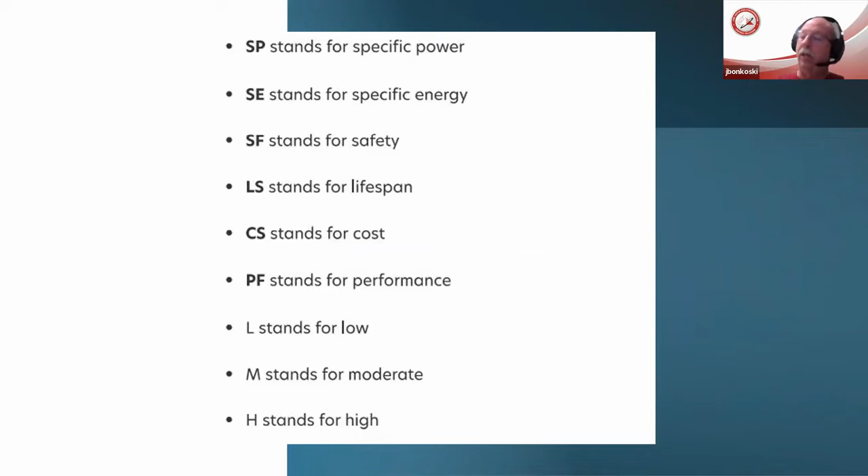When we look at lithium-ion batteries, there are basically 6 current lithium chemistries out there, and I'm sure more are being developed. These different batteries have abbreviations, and when you get this recording you'll be able to see them. They have specific power and specific energy ratings that tell you whether they're high, medium, or low as far as use and cost. People are working toward making these lithium-ion batteries more affordable and hold more power, so in cars we can go longer distances, or with our phones we can do more for longer periods of time.

And when we start looking at it, what are the concerns? Well, our demand is continuing to grow, and we're finding their uses replacing other battery technologies constantly. Currently there are 6 types, but following some articles and magazines, you'll see that groups are working on other chemistries for these batteries. Some of the hazards are the toxicity, the gases emitted when they burn, the HF gas, the flammable electrolytes, and being able to deal with those, as well as the energy stored within the batteries.

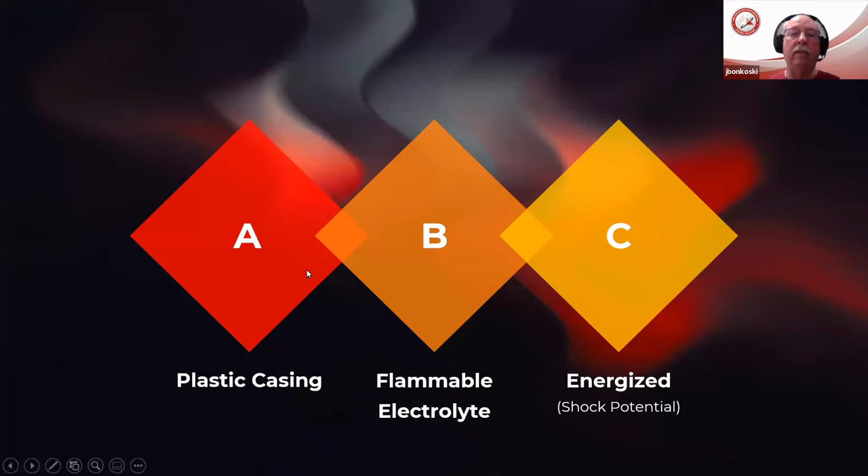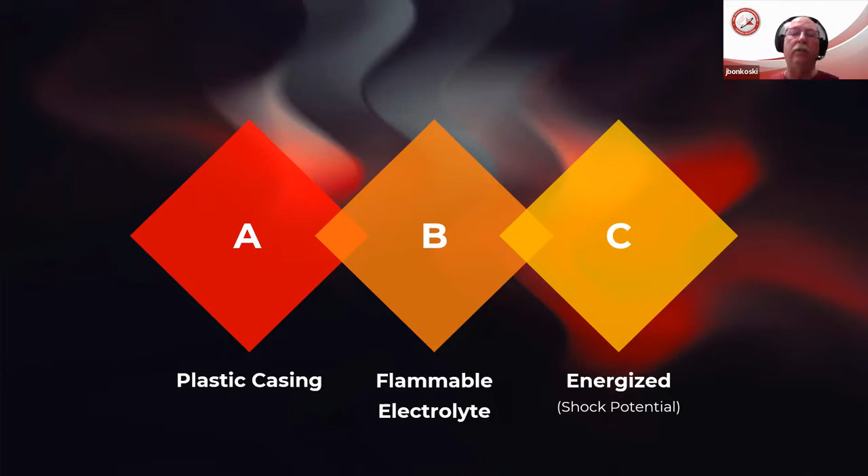We're going to talk about all the different classes of fires, because it's not just the batteries we're dealing with. We're also dealing with the containers that the batteries may be in. I'll discuss these different classes further into the presentation, but just something to be aware of—it's not just the hazards the batteries possess, but pretty much all the different components.

So when we look at what starts the fires, short circuiting can be one of the issues, where by a short circuit the battery becomes unstable and fails. Trauma—batteries being dropped, I'm sure all of us have dropped our cell phones or power tools at one point. Overcharging—if a charger fails, or the safety devices built into some batteries fail, this can allow a battery to be overcharged, causing an overheat condition.

And I'll point out again, when we use our cell phones—if you leave your phone sitting on the console or dashboard of your car while working on paperwork, I'm sure you've picked it up and seen that message about overheating, and it has to cool before you can use it again. So we get into these overheating conditions with lithium-ion batteries as well.

And I wanted to show a quick video involving one of Tesla's cars with an autopilot feature.

The car slammed into a tree and burst into flames. Police tell ABC News it appears no one was in the driver's seat. Here's ABC's Gio Benitez: Tonight, mystery surrounding a deadly crash near Houston involving a Tesla Model S. The charred wreckage captured on camera after it crashed into a tree and burst into flames. Two men inside were killed. The Tesla's high-energy battery reigniting over and over again. Firefighters trying to put the fire out for four hours with more than 30,000 gallons of water. The fire eventually put itself out. Now tonight, the question: was the Tesla running on autopilot? Firefighters found the men in the front passenger seat and the back seat. Police telling ABC News there's no indication anyone was in the driver's seat.

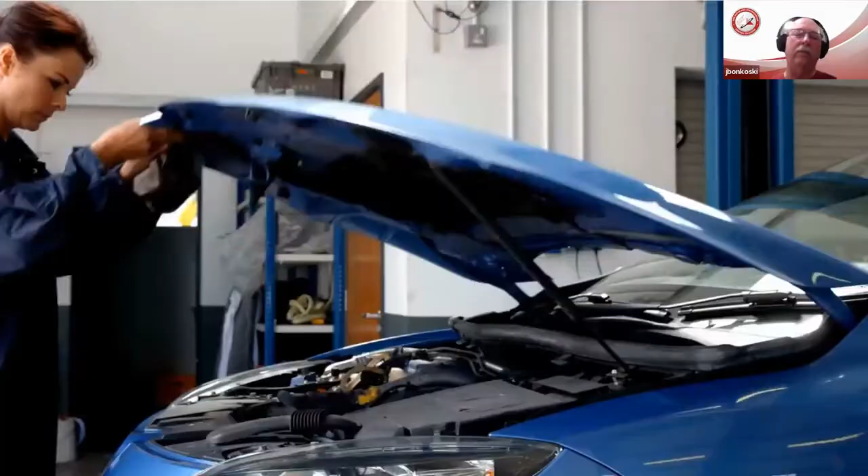So with this video, I want to point out that we're seeing these lithium-ion batteries adopted in many different locations and industries—not only in our homes with laptops and power tools, but let's start looking at them in our automobiles. What are the dangers? I mean, they're continuing to grow.

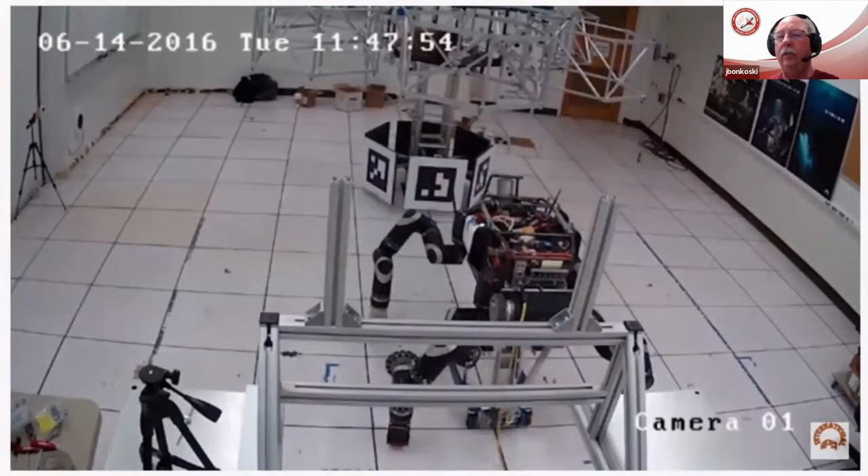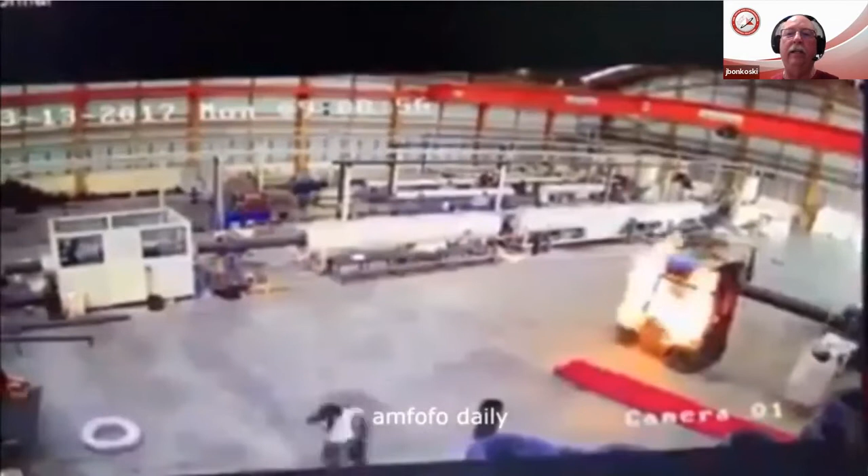I hear people say, let them burn. Is that truly the answer? We have to take into account, if we're going to let them burn, what kind of impact is it going to have—for instance, in a lab, or in a warehousing situation, when we look at the high-lows. I'm going to ask: when we introduce these batteries into our homes and our industries, are we prepared? I'm hoping I can give you some guidance and open up your eyes on how an encapsulator agent can help with those decisions.

So the popularity of lithium-ion batteries in electronics and transportation—especially transportation-wise—the use of lithium-ion batteries is growing exponentially every day. You're hearing about more auto manufacturers using them, and we hear a lot about cars, but we don't hear too much about the large trucks, the semis. How about school buses?

How about some of these other vehicles? You don't hear much about them. They're not really in the news. Manufacturers are starting to look at that, and not only that, but even some farm equipment now, airports.

As we go through, we're going to see where some of these can have an impact on everyday life: our electric and hybrid vehicles, our charging stations. Let's think about the parking garages, dealerships, and the repair facilities where that vehicle gets towed to if it's involved in an accident. Our electric tools and our parts suppliers, and again the towing companies that are going to be dealing with those.

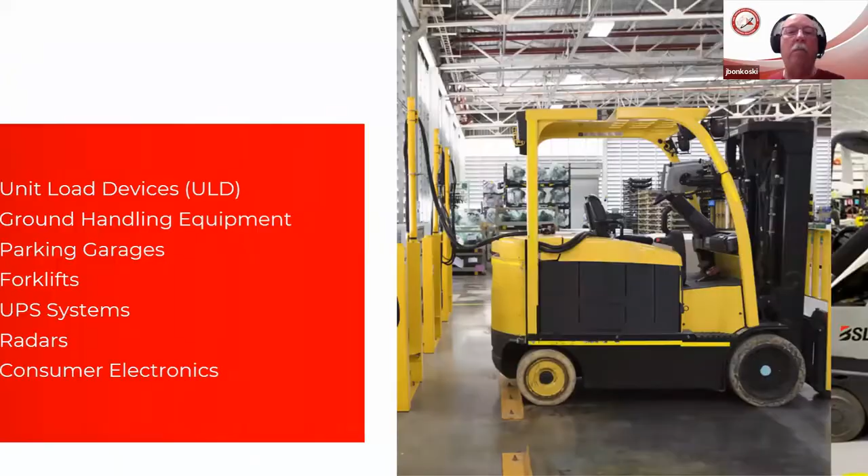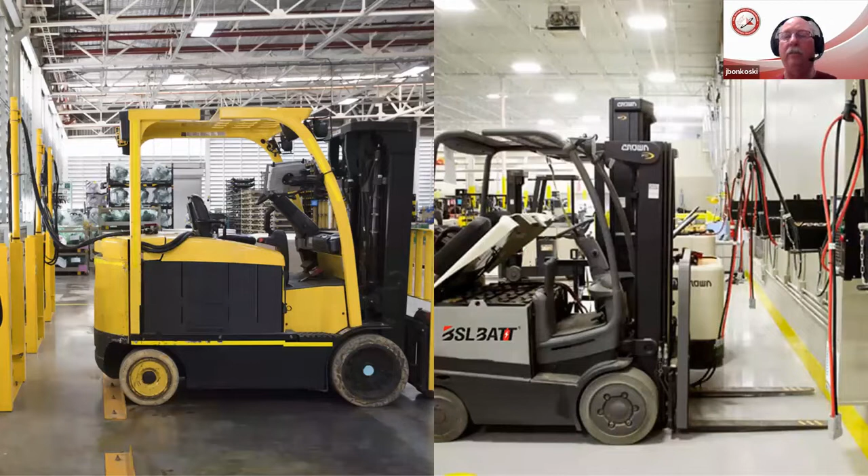The problem becomes when we start looking at these vehicles being charged, we look at how close in proximity each of these vehicles are. And again, when I show this picture, I don't see where any additional fire protection has been put in place.

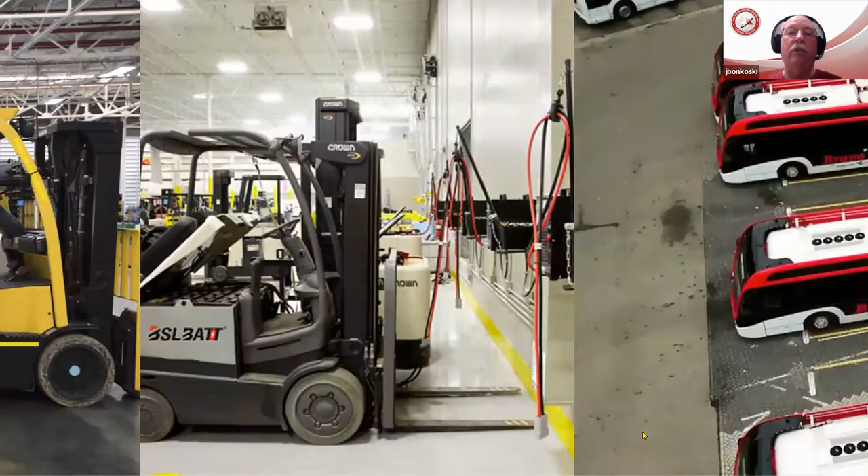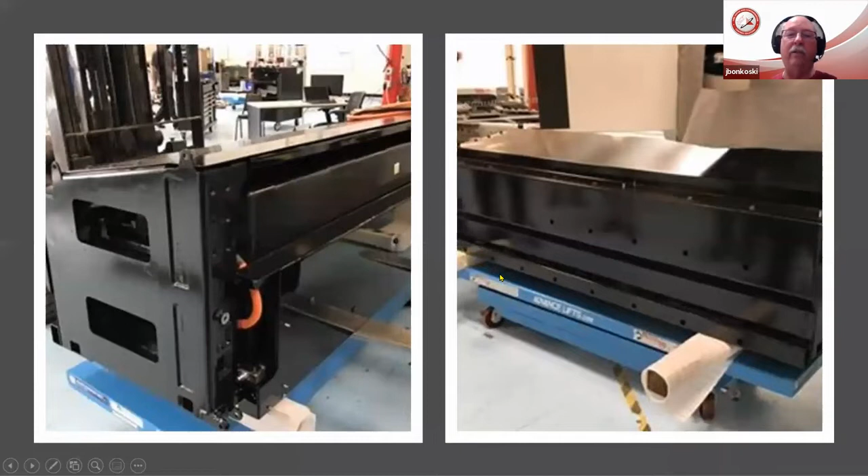So you have these buses and transportations. I mentioned earlier, our semis and tractor trailers are now starting to look at lithium-ion battery technology that they can use for making deliveries within a community where they don't have to have the diesel exhaust when they're stopped and parked. And this is, again, pictures of some of the batteries and the size of them.

As you can see, all they're going to do is get bigger and bigger as we try to make them so these vehicles can go longer distances or we can drive them for more time.

And I want to show this video because it's a good video. Here we are, all of these vehicles parked on charging stations in close proximity.

So while we have the vehicle burning, you could hear the force, the velocity of that fire. Rather impressive. And now you have that fire which is impinging on the vehicle next to it.

I also point out the charging cables, again, being slowly but surely melted away by the fire. I don't see on the charging station itself or in close proximity anywhere within this picture the disconnects.

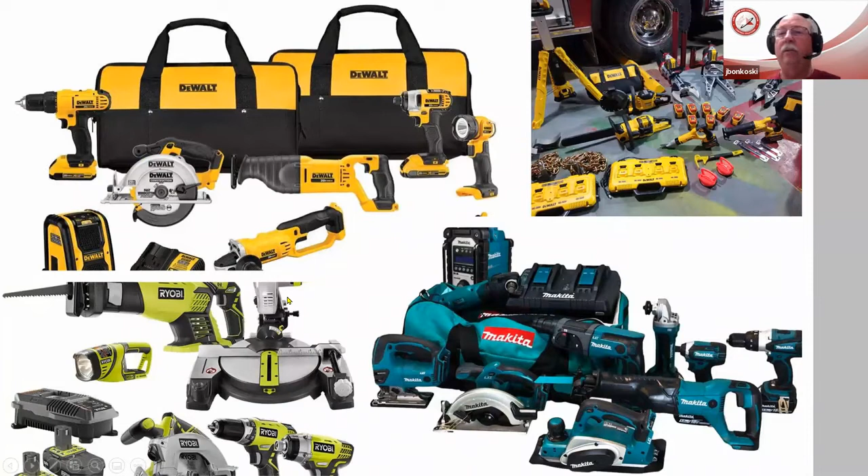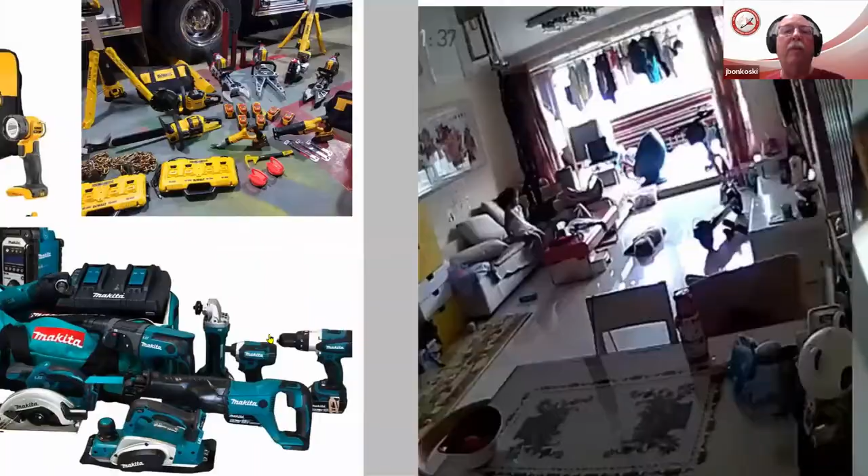One of the other things we like as a convenience is to be able to have another battery fully charged and ready to go when the first one in the tool is going dead and no longer has enough charge to continue being used. So we get into multi-chargers, where we have multiple batteries in our garage. And here we're going to see a quick video showing an e-scooter.

A great example of how, when you get into that fully charged battery - here he was charging up the scooter. You hear that pop where something fails, and all of a sudden that e-scooter gives off a lot of that HF gas and toxic gases, and then we have that rather violent explosion. A laptop - I'm sure we've had, seen, or heard of laptops.

So here you have a laptop charging. I don't know if it had been dropped previously or what type of abuse it might have suffered. Just sitting, charging, and it fails. Something went wrong. An e-scooter.

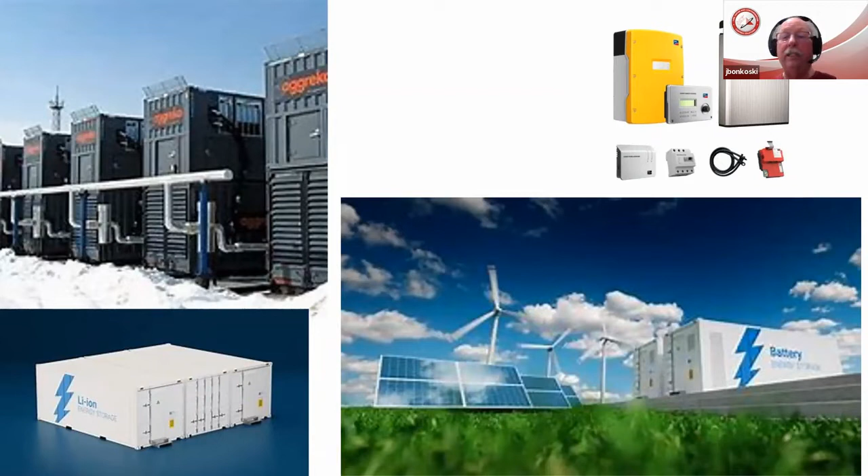So now we're looking at industry. Not only residential storage systems, people trying to get off the grid and be less reliant on the power industry, using solar and saving that energy to batteries, but also industrial storage systems, and mass storage systems where we basically peak shave. We charge the batteries up during non-peak hours, and use that power during peak hours to help power the grid, so we're not reliant on others to help provide energy.

Some of the isolated incidents we can talk about: here we have some in Europe and other countries where a plane, because of a battery burning, is evacuated. We have a boat because of a burning battery, 5 are injured. And again another airplane that's evacuated. In 2019, Arizona, a battery energy storage system exploded and caused injuries, some career ending for firefighters.

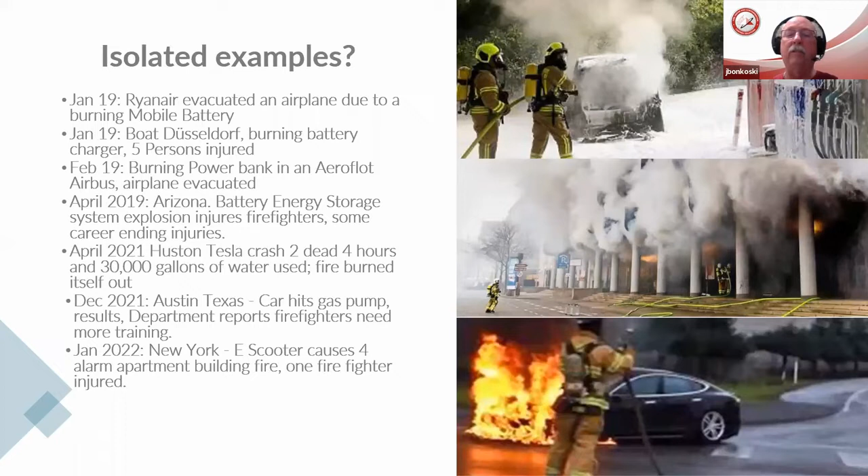Here most recently, in April 2021, a Tesla that killed two burned for 4 hours, using 30,000 gallons of water. Then in December in Austin, Texas, we have a car that hit some gas pumps - you'll see a video shortly - and firefighters saying, hey, we need more training. And most recently, just here in January, we have an e-scooter that caused a 4-alarm apartment building fire and injured a firefighter. So these cases and incidents are starting to increase in number.

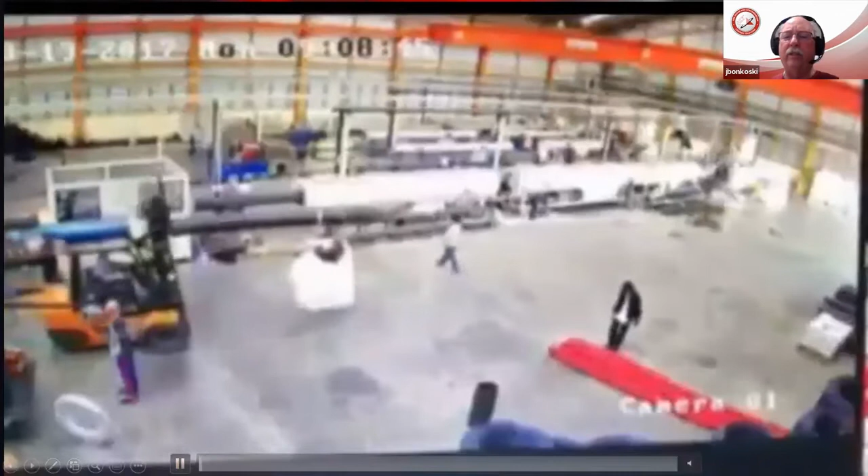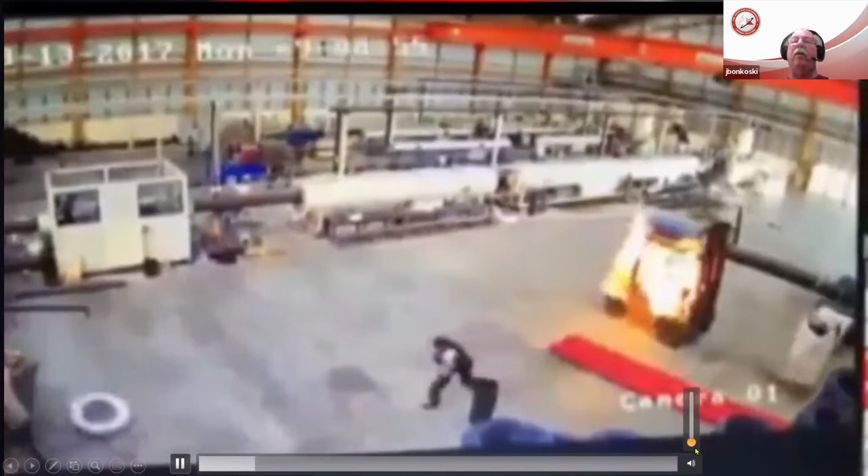This is a good video. It shows a high-low. One of the things I want to point out as we watch this video: what is the extinguishing agent that's required in our buildings? You get into our warehouses, our factories, our high rises, and the required extinguisher is a dry chem, an ABC type extinguisher.

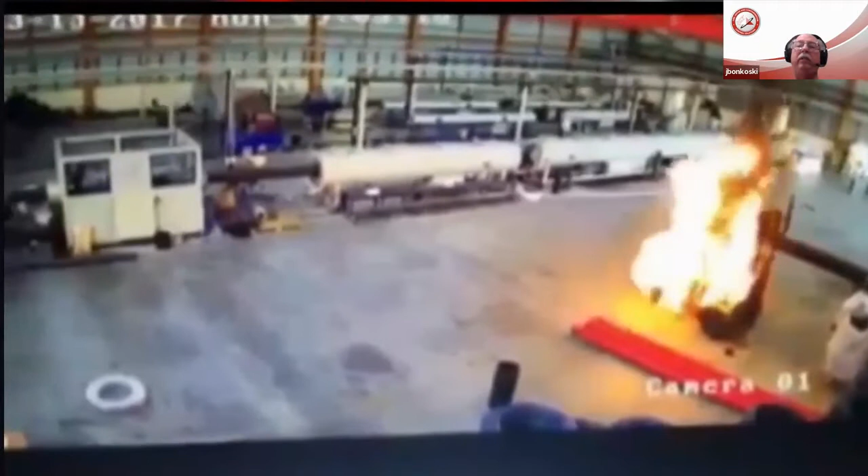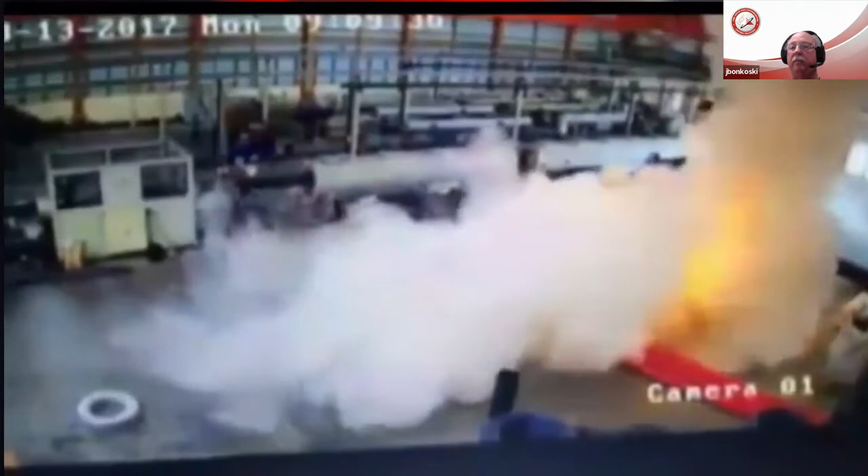And so these employees are running around throughout the facility. They're grabbing these dry powder, ABC extinguishers that are required by code. They're coming along, working to try to put out this fire. It appears as they start to use the dry powders that they're having some success - getting a little bit of a handle on trying to extinguish this fire.

However, you'll see their efforts are in vain. And we're going to go through and see in videos exactly why. But you see that burst, that flare up, that fire flare up - again, just like that truck we saw, that started rolling away.

Here we have the high-low. It also kind of rolls away, rolls further and deeper into the warehouse, burning the warehouse down, causing multi-million-dollar loss because they did not have the right type of extinguisher.

Those buses that I showed earlier on the charging stations - well, how about when they're at the terminal picking up passengers? Let's look at all the dry chem extinguishers on the ground. Again, that's what we require by code, when we look at our building codes and our different codes. So again, I throw the question out: are we, let's put it this way, not only you, but are we prepared when we start talking about these hazards?

So let's start with that dry chemical. Why doesn't it work? Well, it doesn't remove the heat. It's very inefficient at being able to cool. It can't stop or prevent a reignition unless you can build up a pile deep enough to bury it. It does nothing to reduce the toxicity of the gases being released. So it's very ineffective at extinguishing these types of fires.

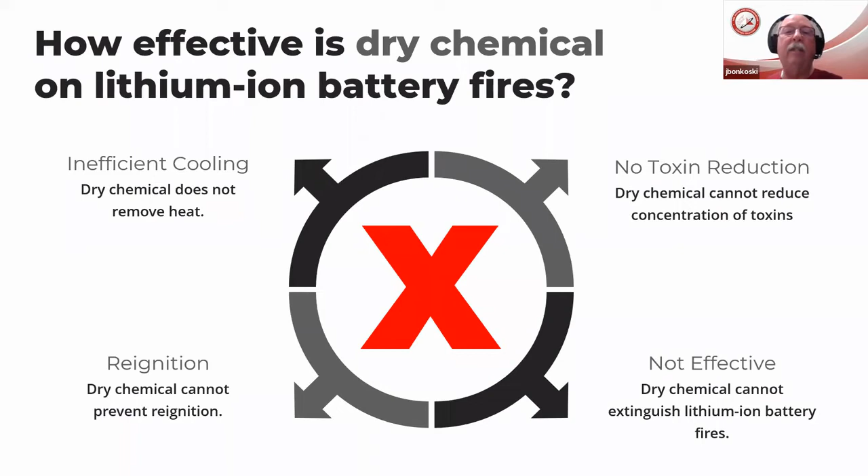And I'm going to show a quick video with the powder. This is showing the 18650 lithium-ion cells, the round ones. It's charged up to 48 volts, 95% charged. We're sitting there using that dry powder, and as you can see, it is very ineffective at being able to extinguish the lithium-ion batteries.

Okay, when we start looking now at foam - what is usually used after firefighters use water and water does not seem to be effective, our next go-to is usually foam. This testing that was done, I'm going to mention more of it as we go through - these videos are coming from testing done on behalf of HCT Europe and Johnson Controls, trying to find third-party independent testing on a solution for lithium-ion battery fires. So these are videos from that testing.

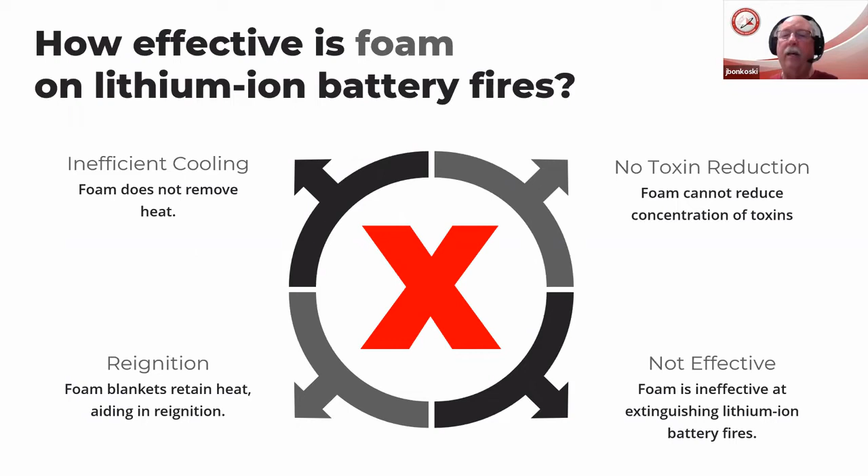So let's look at a video that was done testing foam. Same number of batteries, same charge, 95%. We start using foam, and as you can see, there's no effect. He's constantly spraying that stream of foam trying to extinguish the batteries.

The next thing, and this is one of the things we see recommended for a lot of those energy storage containers, is an inerting gas. They use a few different types of agents. While these inerting gases may be useful in some instances, like switch centers or some applications within our industries, they do very little to cool and cannot stop thermal runaway.

So there's a possibility for reignition once that inerting gas is released from the room, building, or structure where it's been activated. You've still got the heat, the gases, the toxins, everything. This is the case with the Arizona firefighters. While the inerting gas might have extinguished the visible flames, it did nothing to cool or stop the thermal runaway. So when they opened up the container and oxygen or air started to get in, it hit that air-fuel mixture. It was just right, the heat was there, and we had an explosion, injuring some firefighters — career ending injuries.

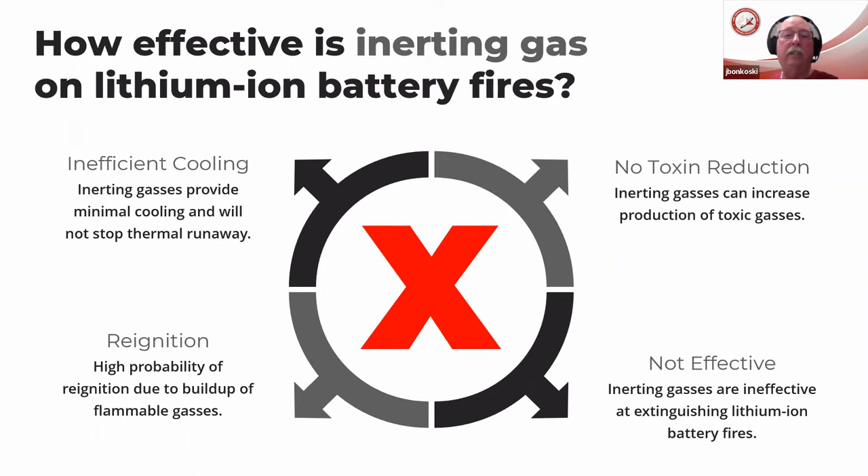So again, not an effective extinguishing agent, especially for some different types of uses.

Here's a video from NASA, in one of their labs. They're working on a robot. Luckily the engineers working on it happened to go to lunch and weren't there when this battery failed. But we have a person who comes in because NASA understood dry chem wasn't the solution, so they use an inerting gas. As you can see, the inerting gas is very ineffective — it has little to no effect at all on extinguishing this lithium-ion battery.

He comes in with a second one. I want to point out that he's exposing himself to that toxic gas, which I'll mention more as we continue the presentation. While he does achieve somewhat of an extinguishment, if the video continues it does reignite — we get a reignition of the battery. The fire department comes along and actually removes the battery from the lab.

The next thing we're very familiar with is water. Everything published here in the United States says the answer for lithium-ion batteries is copious amounts of water. When I was doing my training in the fire service, learning about hazardous materials and everything else, I heard 'copious amounts of water' many times, and it was always a head scratcher — how much is a copious amount of water? The video I showed earlier in the presentation showed 30,000 gallons of water for one car fire. 30,000 gallons — is that a copious amount?

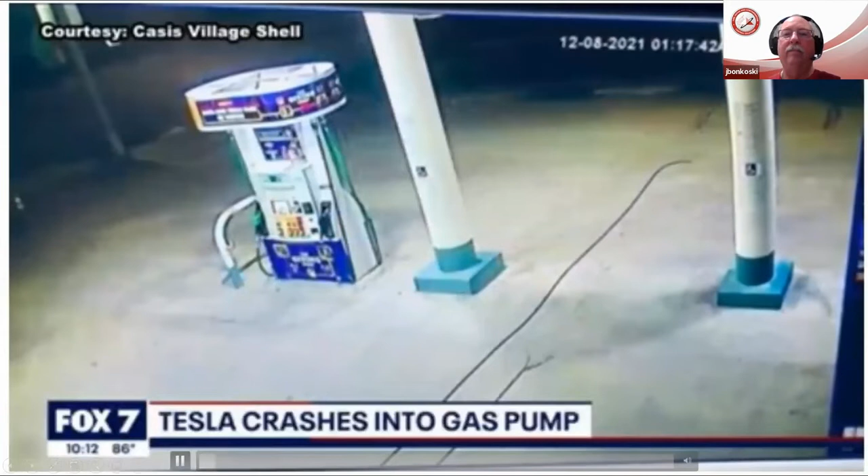So when we look again, here's that Tesla on the left, but we have another one. Image of the Tarrytown Shell station at 1:21 Thursday morning. An instant later, this is the moment when a Tesla sedan slammed into the pump. Flames from exploding lithium batteries created an orange glow. The driver, who was not immediately identified, survived but was charged with DWI.

When the gas pumps fell, flames coming from the passenger side of the Tesla can be seen. About a minute later, sparks erupt as more batteries ignite in what's called a thermal runaway. It was a situation Austin firefighters were prepared for, according to Division Chief Eddie Martinez. We've known about these for quite a while. It's just, in the city of Austin as far as I know, this is our first one specifically with the Tesla.

This picture shows fire crews in tactical positions for what was a long fight. The fire burned all the way to the car's frame. But lithium batteries can play possum and reignite. A warning, Martinez says, was given to the tow truck driver. And it did - 5 hours later, the car caught on fire again. But he took our warning and put it away from vegetation. He put it away from other vehicles so it didn't catch anything else on fire.

The fire that happened here is expected to be discussed during a training session Austin firefighters will have next week. That class will be taught by the fire chief from the Woodlands, who's become somewhat of an expert on Tesla fires. These car fires can be managed - we're going to see a lot more of them in the future.

Chief Palmer Buck told me this fatal crash in April is an example of how difficult the job can be. It took more than 28,000 gallons of water to keep the charred battery pack cool. That allowed investigators to work without having another thermal runaway. Just doing all the research, it still comes back to the basics of water, but a lot of water. There's not any, at this point, any easily obtainable extinguishing agent on the market to deal with these fires.

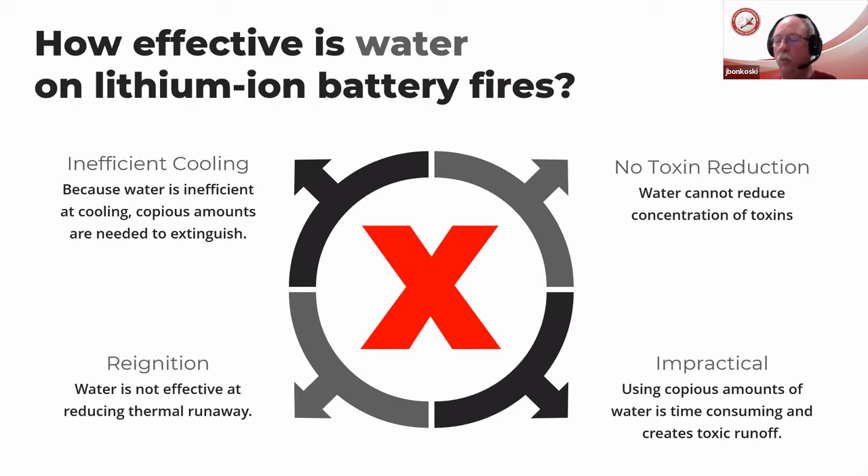Because as you can see, here we have people going and calling themselves experts. And again, I'm not trying to bash anybody, but when you look at the trainings that we have here in the US, the solution and the answer is for the fire service: copious amounts of water. We haven't looked at anything other than that, and that's why Europe is light years ahead of us, and why HCT is wanting to do these webinars and offer trainings to firefighters so that we can work. And I show this video, a nice little waterfall trickling down, water trickling on down a little stream, because when we talk about 30,000 gallons of water on one car...

You look at the second Tesla there in Austin where it hit the fuel pumps, and now you're dealing with two types of hazard - you're dealing with a hazard of fuel as well as the batteries. And while many of these departments are saying they have fire hydrants, they have all the water they need, they don't have an issue with that - many areas of the country, in the United States and even around the world, are going through drought conditions. So now I'm going to ask again: do you truly have an extra 30,000 gallons of water for one car?

And as these batteries get bigger, are we going to be able to deal with them and control them? What's a copious amount of water?

So as we've seen what other agents and what other types of extinguishing mediums have been able to do with this type of hazard and emergency, let's start learning a little bit about F500 and encapsulator technology.

One of the big things when we start looking at firefighting agents or solutions, we're trying to get away from PFOS, PFOAs. We're trying to get away from fluorinated ingredients that are the forever chemicals. F500 has been tested and is 100% fluorine free. It's non-corrosive and 100% biodegradable. We're not going to stay in the environment. We're not going to be a forever chemical.

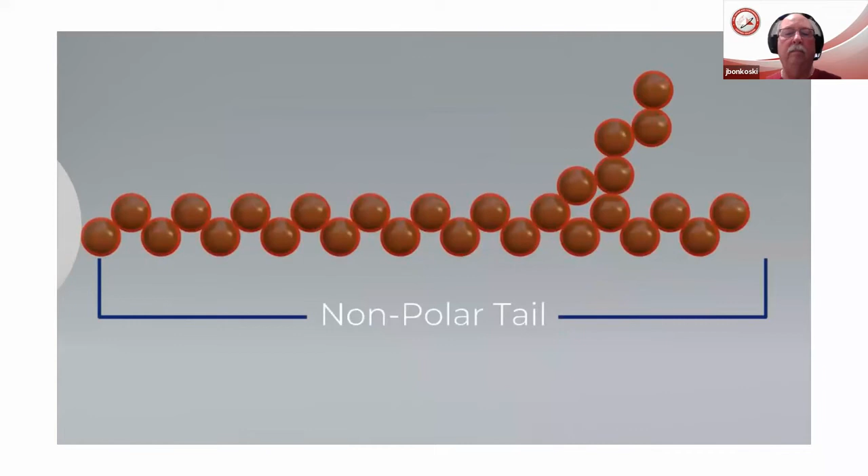Encapsulator technology, the next generation of fire and hazard mitigation. First, we start with a simplified version of a single encapsulator agent molecule consisting of a hydrophilic polar head which loves water, dissolves in water, and a hydrophobic non-polar tail which fears water and will do anything to get away from water. Once the EA molecules enter the water, they instantaneously and automatically orient with the non-polar tails inward and the polar heads outward, forming millions of spherical micelles.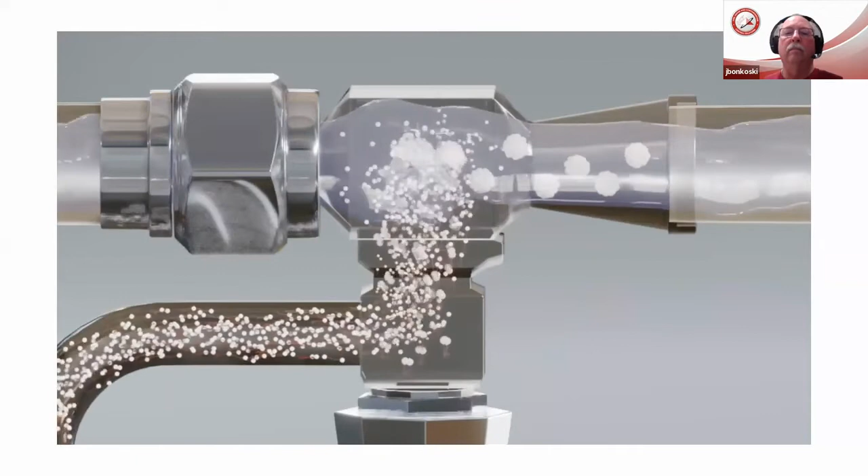Micelles travel towards and exit the nozzles, forming EA droplets. Micelles nearest to the surface of each droplet automatically break apart. The non-polar tails orient outside the droplet with polar heads on the surface, forming an EA skin on the surface of every droplet. In addition to the EA skin, there are millions of molecular spherical micelles within each droplet.

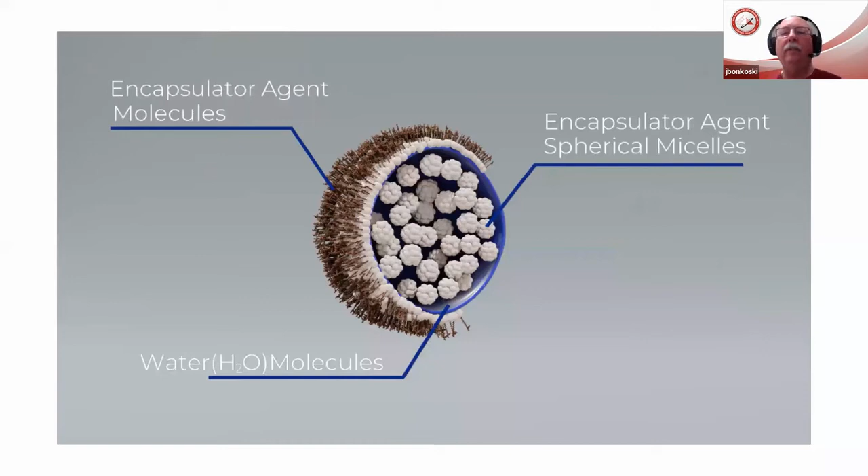Okay, so that gives you a little bit of an understanding of what a spherical micelle is. And again, I'm going to review what we just saw. That molecule has a polar head, loves water, okay? A non-polar tail hates water, does everything it wants to get away from the water, which is one of the ways that when you add an F500 encapsulator agent into water, it mixes instantly because of those tails trying to get away from the water. So it spreads out and mixes with the water rapidly.

So once it mixes and creates those spherical micelles within the water, as that water comes out of a nozzle, a sprinkler head, or whatever source it's being utilized from, those molecules on the outer surface of the water droplet spin away from that spherical micelle. So the ones on the surface break apart and form a skin on the surface of the water droplet.

So when we start looking at some of the different classes of fires that we're going to be talking about, that becomes important as to why it's able to rapidly cool, why it's able to rapidly extinguish, and how it's able to do all the things that we're going to continue to talk about as we go through the presentation.

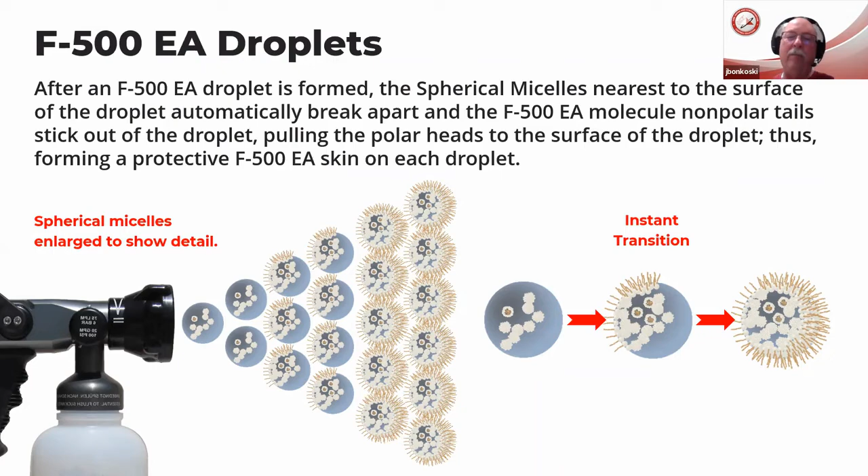But one of the things I want to also point out in this picture, if you look at the very last water droplet to the right, you'll still see that there are millions of those spherical micelles in the water droplet. So we're not only putting a skin on the surface, but we still have millions and millions of those spherical micelles inside of each and every water droplet, which is important to help understand how encapsulator agents work.

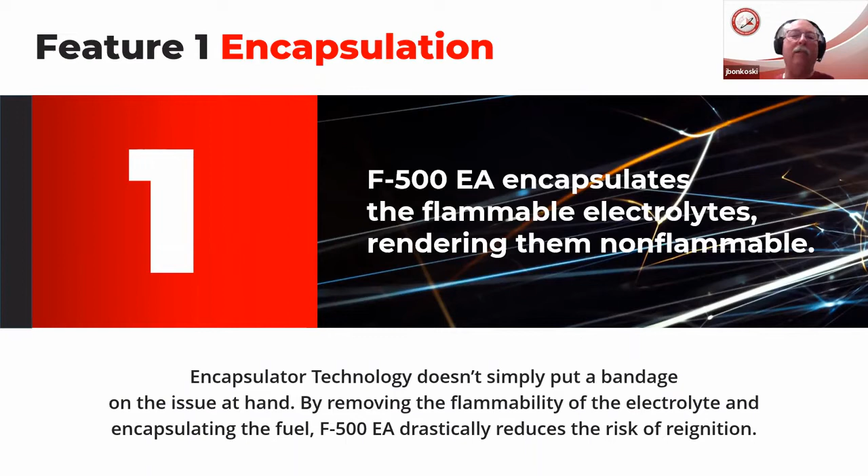So I'm going to talk about encapsulator agents and how they're able to work on flammable electrolytes and why they're able to work on those flammable vapors, because of how and why they work.

We're going to talk about that rapid reduction in heat. And if we think back, if you're a firefighter, on your very first day of school you learned about the fire triangle. If you remove one of the legs of the triangle—of course I'm dating myself when I say triangle because now it's a tetrahedron—but if we remove one of the legs, we extinguish the fire. Well, we're going to see how we're able to encapsulate the fuels, how we're able to rapidly reduce the heat, and how we're having an effect on all the different parts of that fire tetrahedron.

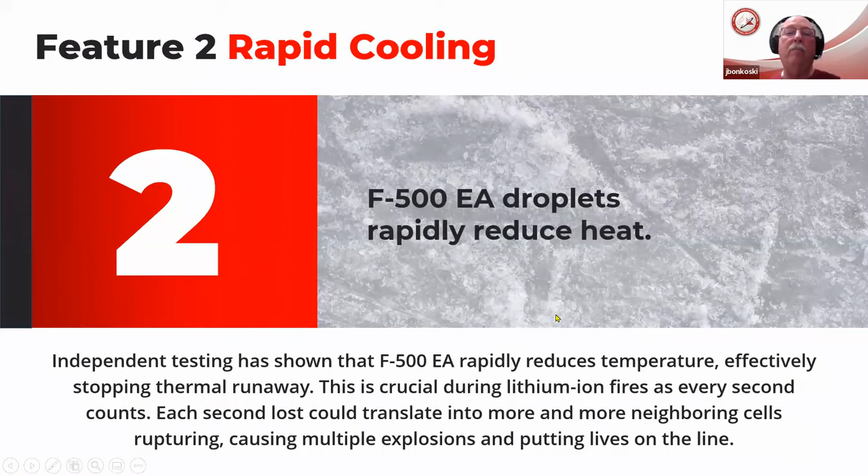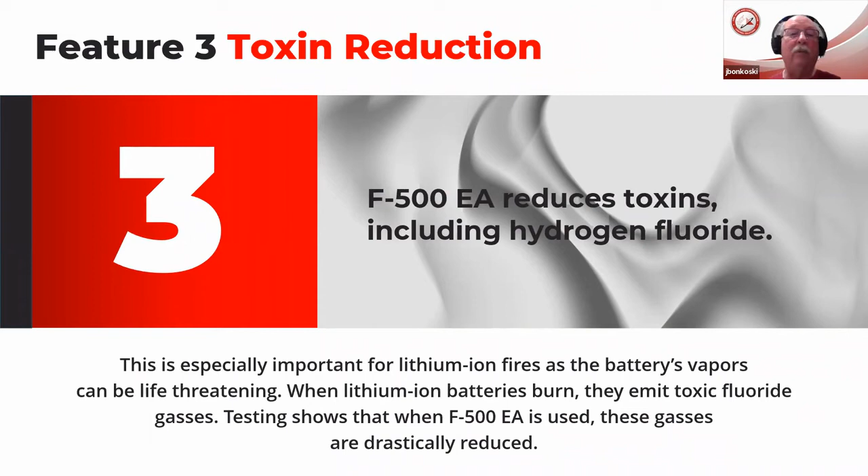Some other things we're going to talk about are the reduction in toxins - the HF gas being released and how it can be life-threatening. Think back to the gentleman in the lab with the CO2 extinguisher, the inerting gas, or the gentleman in the house with the e-scooter where you saw the amount of smoke released from those batteries. We're going to talk about how F500 does rapid cooling and stops thermal runaway, how by encapsulating those flammable electrolytes we reduce and eliminate chances for reignition, and how we encapsulate and reduce the amount of toxic gases being released.

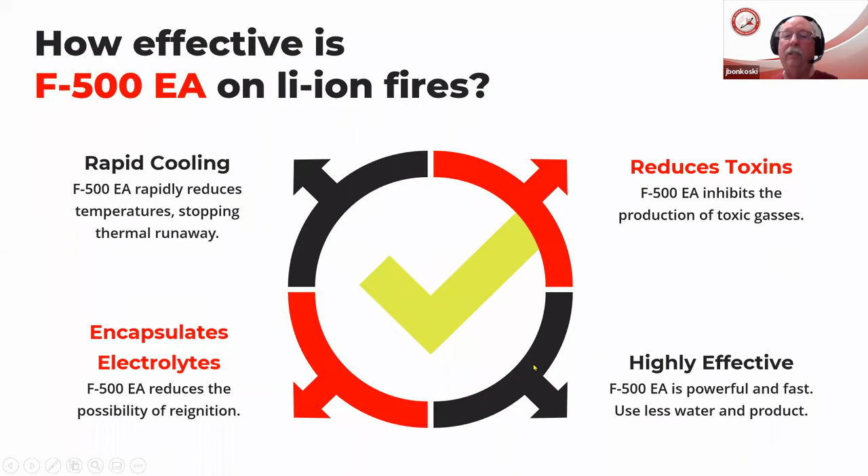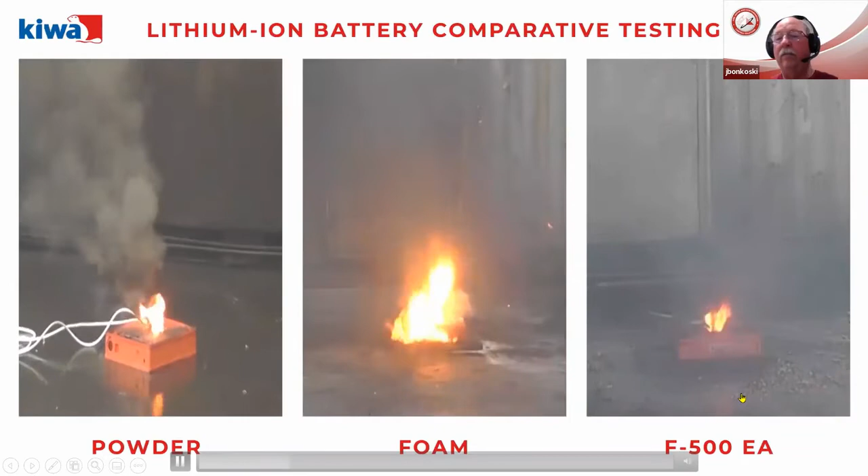So I want to show this video, which is comparative testing. I know I showed videos side by side earlier. Here you have the powder on the left, foam in the middle, and to the far right F500. In the first video with the foam, they were using a constant spray application. With the F500, you'll see he's using short little squirts, not a constant application - just short squirts, getting into a bit more application, and he's pretty much extinguished this battery.

Now on the left, with the powder, as he came into view he did not have an air pack on. This initial testing done with lithium-ion batteries led to that gentleman who was doing the extinguishing spending time in the hospital detoxing because of the HF gas he was exposed to during the testing.

Because of that, testing then went indoors and was more thorough in looking at other things. This is one of the things that came out of the published report for Johnson Controls, and it basically states that powders are poor, not recommended, do not apply on lithium-ion batteries. Yet what's the extinguisher we have in all of our buildings? What's the one that's required?

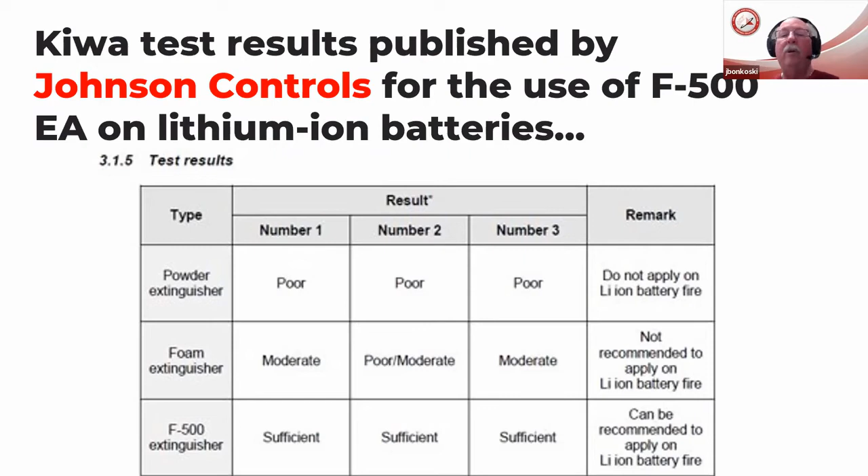In Europe, they found a solution. In fact, they're marketing through one of their distributors fire extinguishers with literature and pamphlets recommending F500 encapsulator agent as the agent of choice for lithium-ion batteries because it could stop thermal runaway. Some more conclusions state that a handheld extinguisher with F500 additive is better to achieve suppression with these lithium-ion batteries. So that's why they're marketing them.

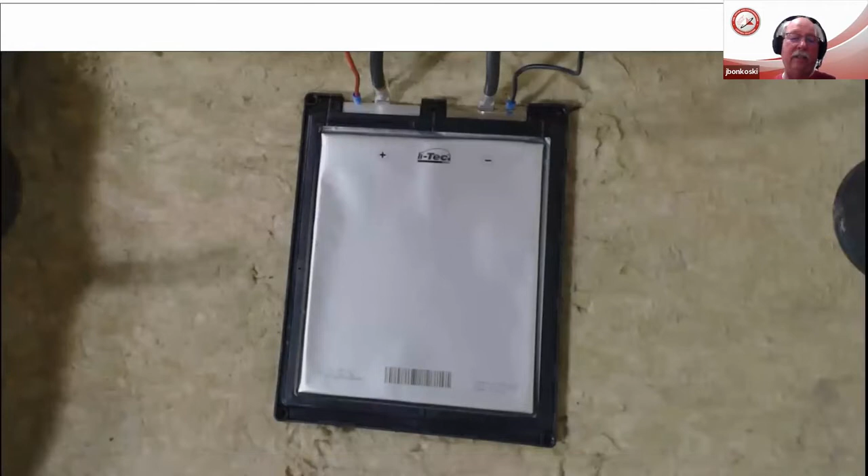We've seen the videos with the 18650s, and when we hear about these fires in the news with Teslas, Teslas use 18650s. But I want to point out that's not the only type of battery being used in vehicles. Here's an example of a polymer pouch style battery that might be in a laptop.

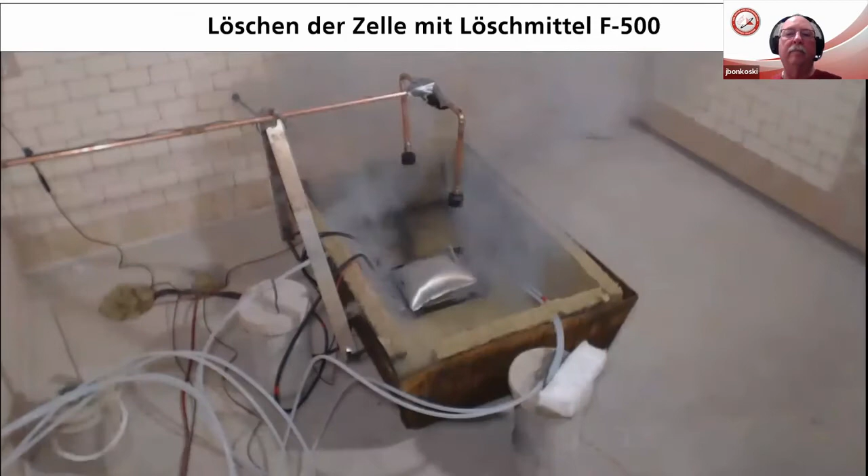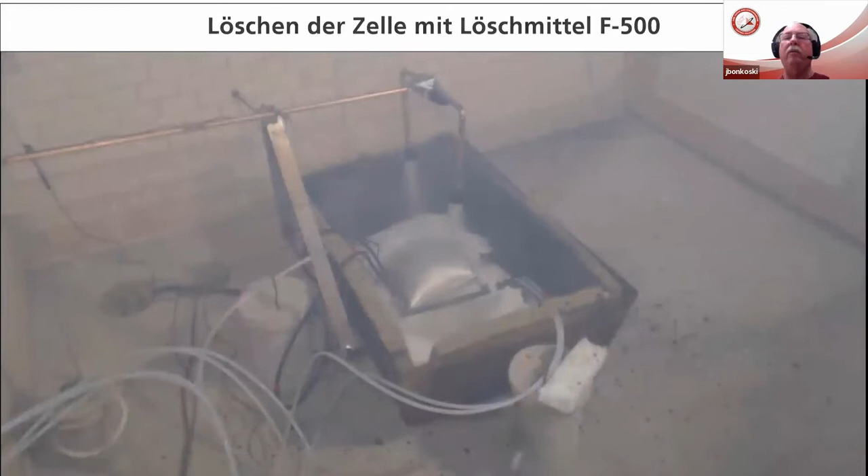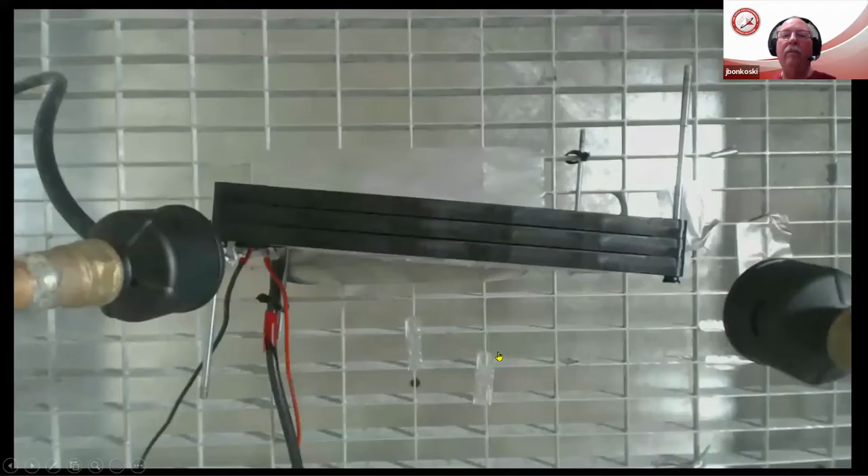One thing to point out - the sides of the pouch are what open up, and the electrolyte and flames come out of the side pouch of that battery. Yet when we look at the application of the F500 solution, it's landing on top of the package, not entering into it, but it still has the ability to cool and extinguish with just the overspray getting in.

Another example of a polymer pouch style battery - the spray, as the battery fails, is going to hit the top of the plastic structure. As it sprays, the overspray will basically spray off and hit the top, and you're going to get some of the overspray that extinguishes this battery.

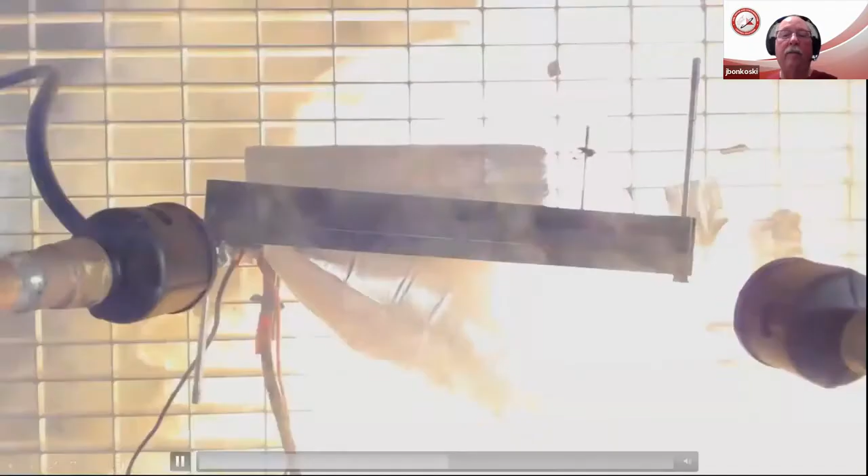You can see some of the splashing and the overspray is what's really doing and having the effect on being able to extinguish.

This is some of the indoor testing that was done. This is going to be a somewhat long video that I'm going to speed up. There are multiple things I'm going to point out as I go through. If you look at the top left picture, you'll see some whiffs of smoke come off of the battery as it starts to heat up. We have our thermal imaging camera on the top right, and on the bottom right we've got some thermocouples, some temperature sensors that monitor temperatures within the battery. I'm going to start this and explain what's going on as we go.

As we start speeding up, the thermal imaging camera is going to start showing some heat building up. That top left, you'll see the little whiffs of smoke starting to appear. We're starting to get a little bit of heat building up, still really not that hot. Our little whiffs of smoke are starting to get a little bigger there. Very soon we should have that ignition.

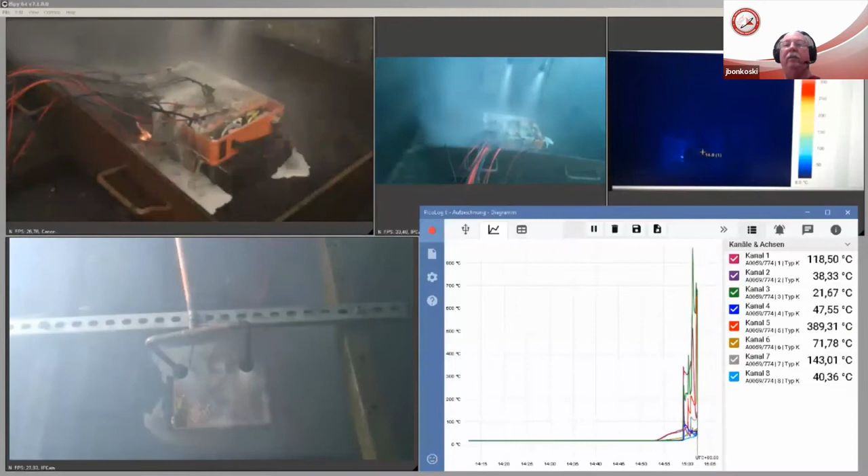So, a copious amount of water, or F500 - you see how little was used.

As we continue through this video, you can see there's no increase in temperatures. Some of the thermocouples that were used have failed, but as we continue, none of those temperature sensors are starting to rise, showing that heat isn't building up and getting ready to go into reignition. So once that battery's been extinguished, it's no longer a hazard as far as worrying about it reigniting.

Some other information - as I mentioned earlier, that gentleman in the first few videos using the different dry powder and foam and F500 without an air pack had to spend some time detoxing. That led to some additional testing, done by TU Clausthal University, looking at the HF gas being released. Looking at the parts per million on the right, without trying to extinguish with water, you'll see that in one of those 18650 cells you're about 227 parts per million.

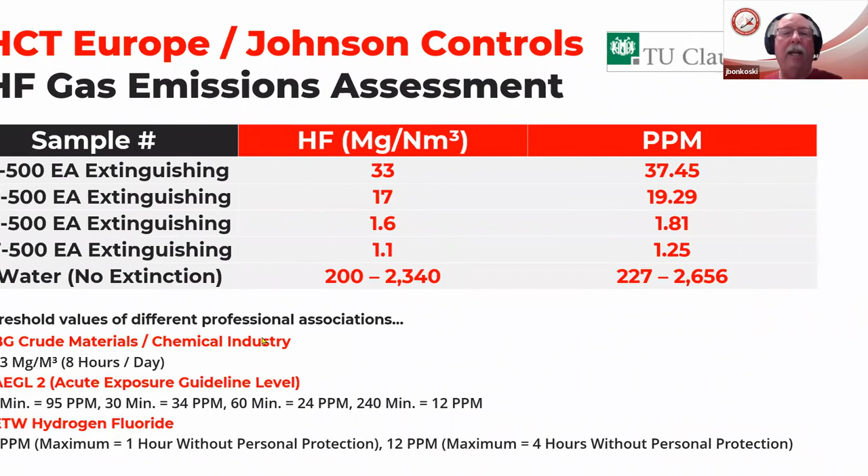So we start looking at NIOSH, at our different guidelines for acute exposures - you've got 30 minutes at 34 parts per million, excuse my language. That gives a person a chance. If you've got somebody who's been injured, you're giving that person some time, giving them a chance to survive an exposure without health effects. When we look at that reduction in HF gas, it brings up another topic, because as I mentioned earlier, it's not just lithium-ion batteries burning when we talk about automobiles - it's other things.

This is information from a test done by Clemson University. When people were watching our earlier videos of fires, with black smoke turning white, they asked what's happening. This test is an indication of what was taking place.

They used toluene as their fuel source and sprayed a 3% F500 solution through the smoke column. They looked at three things: light transmission through the smoke column, the amount of soot that accumulated, and the toxicity of the soot.

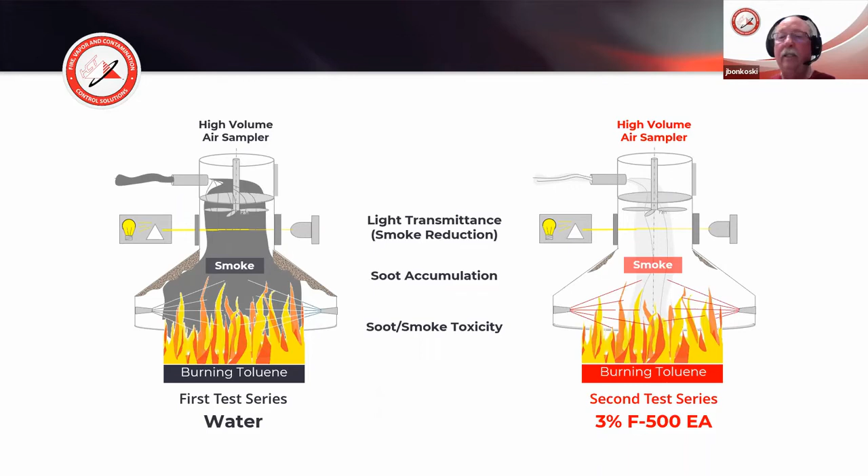When they finished, the report came back that they were able to reduce the smoke and increase visibility by 68%, reduce accumulated soot by 97%, and reduce the toxicity of the soot and smoke by 98.6%.

So when we look at everyday fires in the fire service, not just lithium-ion batteries, but cancer in the fire service caused by all the synthetic materials used in homes today, here you have an agent that can reduce soot toxicity by almost 99%.

Again, it goes along with lithium-ion and HF gas and all the classes of fires we're going to see in our cars. You saw the Tesla hitting the gas pumps. We could have multiple fuels involved with these accidents and hazards, so we look at all the classes of fires this can be used on.

Class A fires are normal combustibles, Class B is flammable liquids, Class D is metals. Now, who's ever heard of using a water agent on a Class D fire?

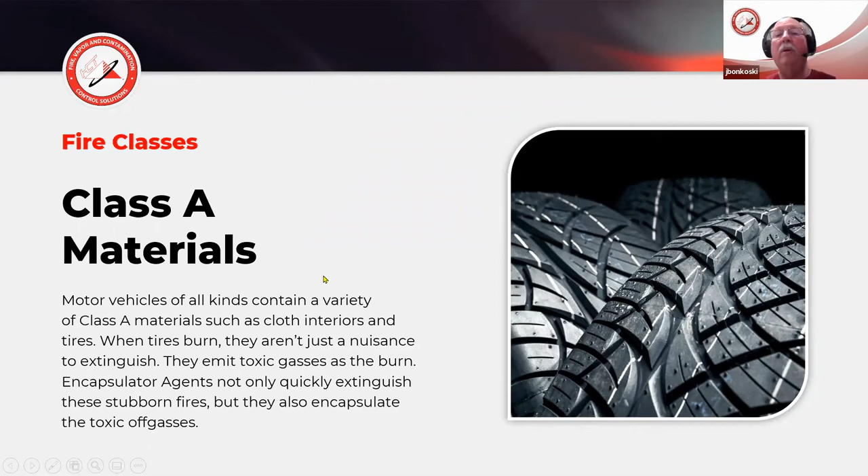So, tires. As firefighters we know tires can be difficult fires, especially when you have a lot of them. They create a lot of heat, they're a nuisance, and like a lithium-ion battery, you could spend many hours trying to fight a tire fire, especially at a recycling site with a large amount of tires. They're difficult and stubborn, yet F500 has been used on two of the largest tire fires in North America.

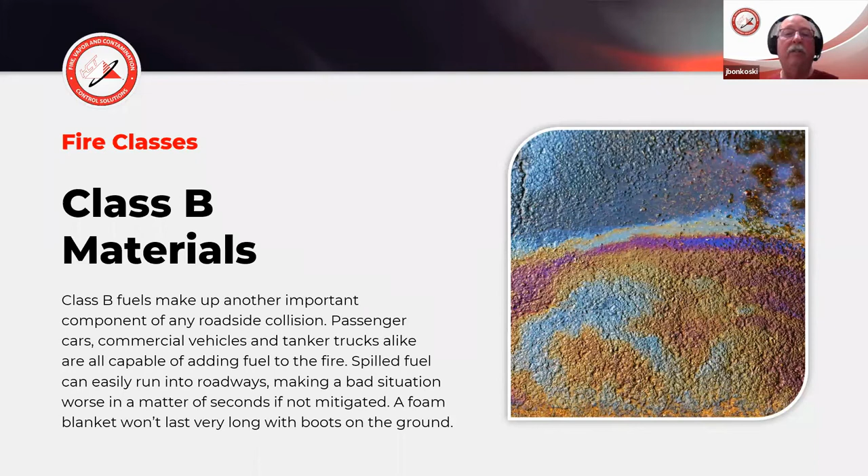We look at Class B materials, our fuels, polar solvents, ethanol, alcohols, and other things going up and down the road, and how we're able to mitigate spills and extinguish these fires. F500 is listed in the National Contingency Plan as a surface washing agent, so we're listed for use on these types of incidents as far as controlling spills.

I mentioned Class D metals, like a water additive being used on a Class D metal fire. It's unheard of—if you look at the standard, no water when it comes to Class D metals. But I can point you toward some Class D metal manufacturers, some die casting companies, that are using it and absolutely love F500 for use within their facilities dealing with Class D metals.

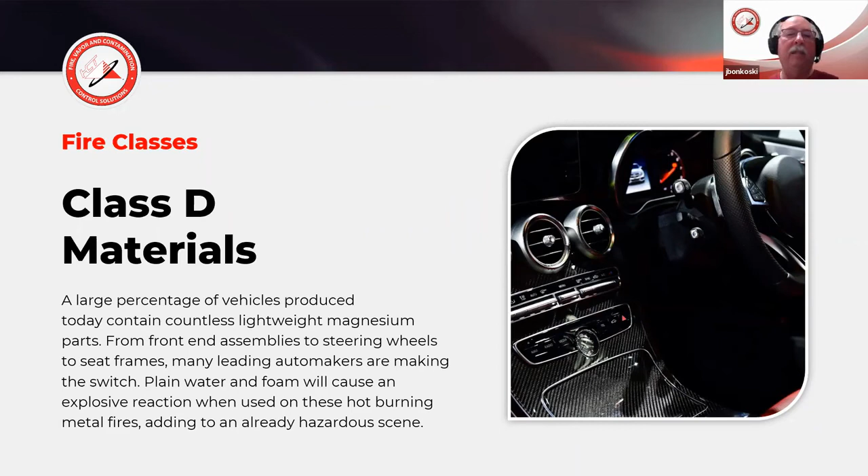So the solution is education. As mentioned with the Tesla hitting the gas pumps, fire departments need education, and we hope to be that source. We want to come out and train fire departments and employees on the hazards of lithium-ion batteries, sharing information from all the testing that's been done, so we can make firefighting a safer profession.

If we look at F500, it's not just Johnson Controls that has done the testing—we have Bosch, we have Tesla, basically leaders in the industry that have standardized on this as a solution for lithium-ion batteries.

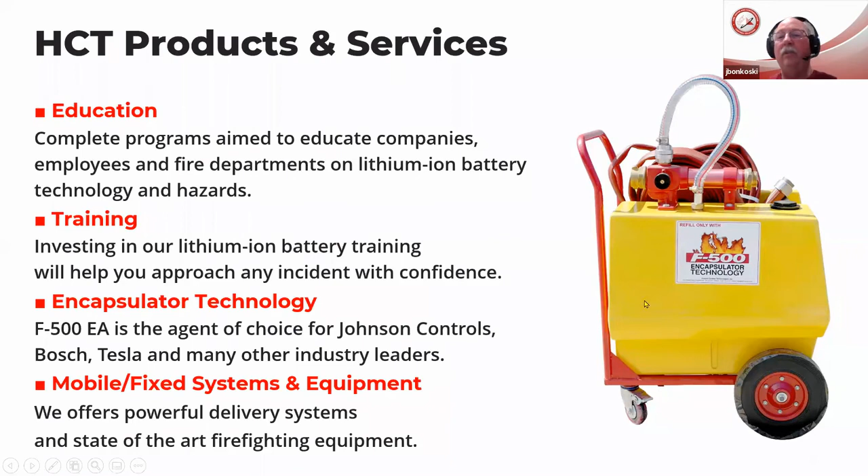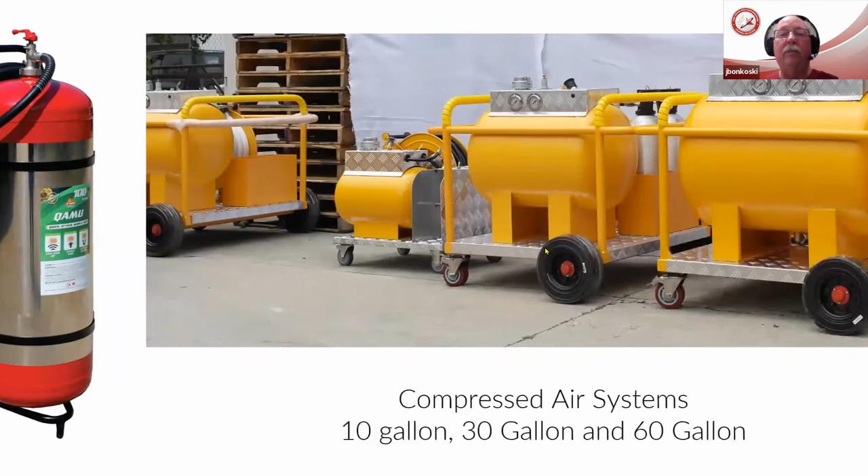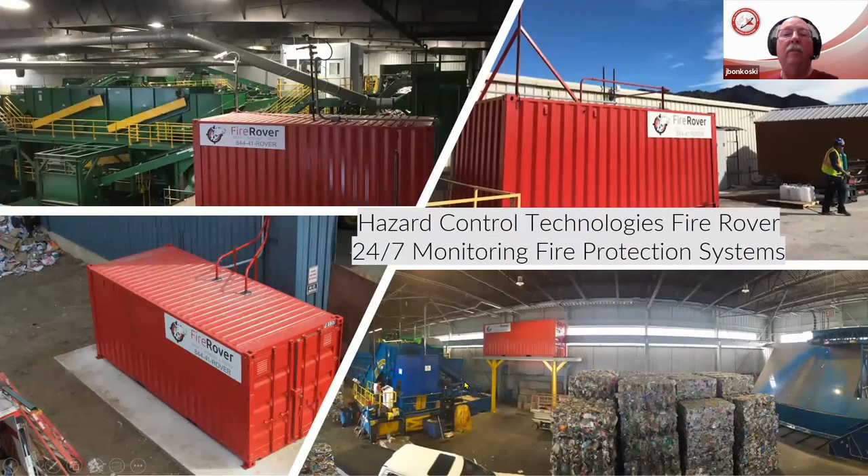So you have mobile and fixed options. We offer carts in two different sizes with an inline eductor, fire extinguishers with 2.5 gallon or 6 liter capacity, and what we call our quick attack mobile units. We have carts and compressed air systems in different sizes that can be utilized to help with extinguishing. We've also partnered with Fire Rover to help with some unique applications and offer fire protection.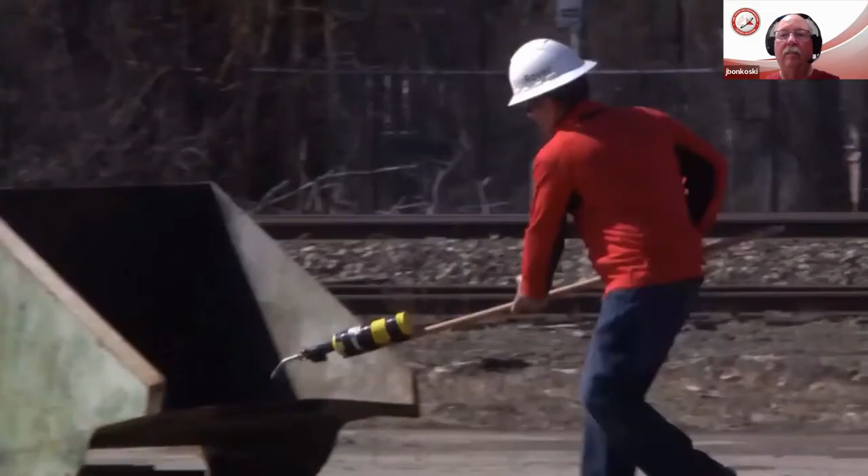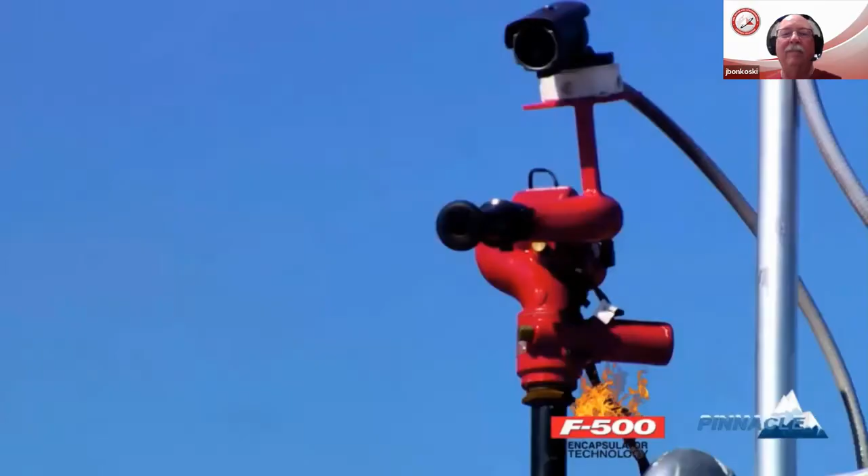Here's how it works. The thermal camera detects changes in surface temperature. Abnormal heat triggers an alarm and alerts Fire Rover's live monitoring station. Trained operators evaluate the risk and can trigger the firefighting agent remotely within seconds, aiming it using both thermal and HD footage.

The firefighting agent is 100% biodegradable and effective on metals, petroleum, plastics, agriculture, rubber, general waste, and more, including lithium-ion battery hazards. Fire Rover can reach a distance of 150 feet with a radius of 343 degrees.

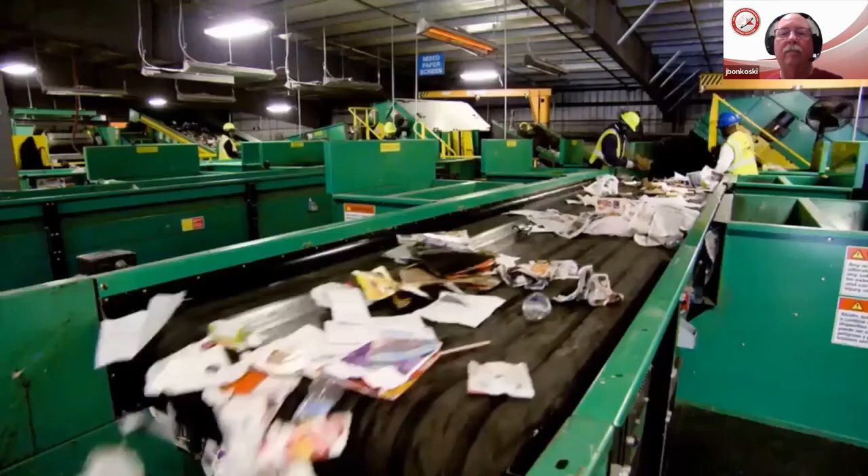The thermal camera confirms when the fire is extinguished and the surface has cooled, eliminating the need for costly fire watch. Fire Rover is always ready to detect and extinguish fires and keep your operations safe. Contact us today to start protecting your business.

And that pretty much covered some of our recycling industries, but these systems can be utilized wherever they need to be, wherever you need to have monitoring taking place.

And as it shows, we have other options, which we call our concentrate control, which is your normal setup that you often see in many high hazard areas, such as a bladder tank connected to your tank.

One of the things that we're liking a little bit more, and kind of recommending now because it's a little bit more efficient and more cost effective as far as maintenance and overall usage, is our Diamond Doser water-driven proportioner.

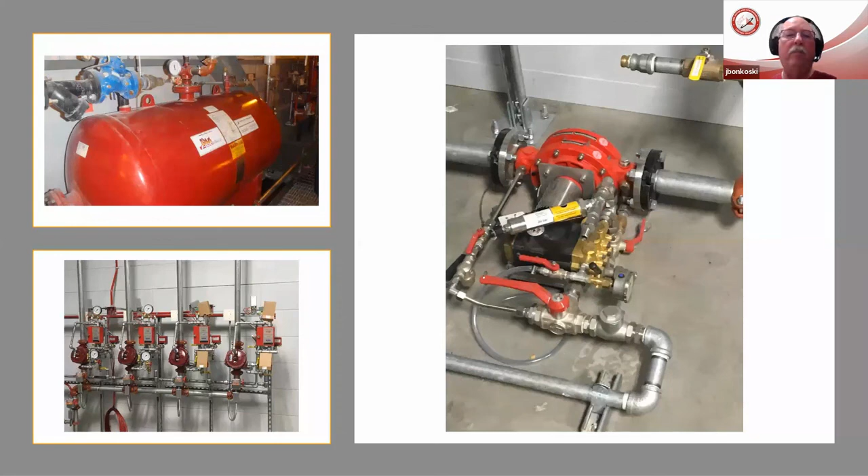And then, as you see on the bottom, these water-driven proportioners can feed and supply multiple risers to protect multiple areas of the plant without having to have redundancies in systems or install a bunch of concentrate control systems. This will be recorded and shared with you, so you'll be able to see this information and read through it.

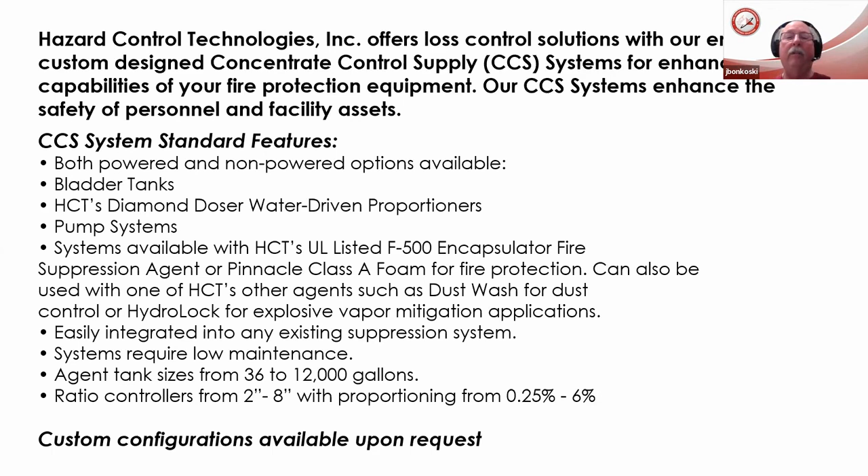But like I said, we have multiple systems. We're more than willing to work with fire protection contractors in including encapsulator agent in their systems to protect some of the high hazard applications they may be faced with.

But I'm getting ready to end, and I want to say that when you look at encapsulator agent, yes, we're here. We want to encapsulate the world. We want to make it a safer place. We want to be able to help with those high hazards. And as it says, we want to be a leader in the industry around the globe.

So I'll end and say thank you all, and say it's time we wake up. It's time we look at the solutions. And to us, it's very important as a company that we be involved.